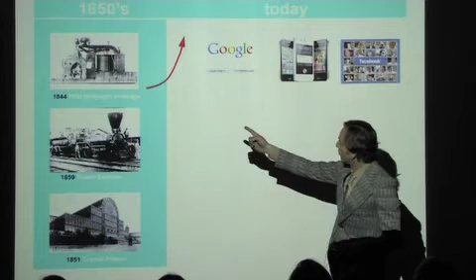Since then, a lot has happened too. You could say growth in communication has been absolutely logarithmic. Today we have all of human knowledge at our fingertips with Google, and supercomputers that are really phones - or are they supercomputers? They're pocket size. Then Facebook and other technologies that make communication a completely new thing. Similarly in transportation, we have supersonic jet planes that can cause havoc, green cars with high performance, and even a rover cruising the surface of Mars. Quite extraordinary things have happened in different directions within transportation.

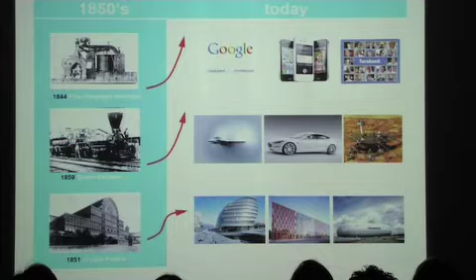But not so good on the construction front - we're building exactly the same way Joseph Paxton developed 150 years ago. So why is that? After all, in your opinion, which is the bigger industry, the bigger percentage of the world's GDP? Ours, essentially. Which has the most environmental impact? Which is the biggest polluter by far, almost doubling the impact of the next runner-up? Which employs more people, and importantly, represents a basic human need - one of the three basic human needs: construction. So how can we account for this?

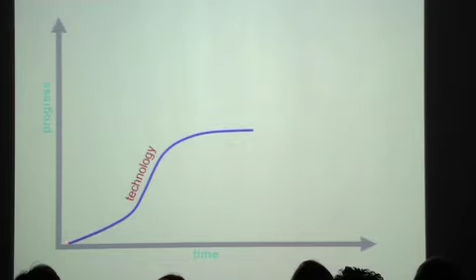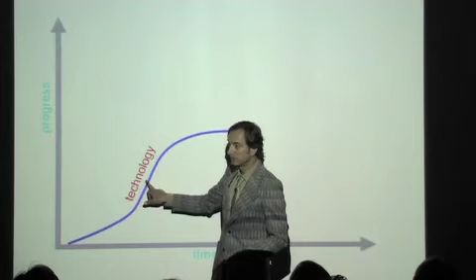Let's look a little at how ideas and progress work. Imagine Joseph Paxton was down here at the beginning of this new technology - here's Joseph. Then you have Gustave Eiffel doing towers and other buildings. Then different applications like train stations, bridges - the bridge of the Forth or Firth, whatever it is. That's where the growth curve begins, this logarithmic growth curve we like. But then it never really goes any steeper than that. Still, things are happening - the modernist movement comes and develops a new aesthetic around steel frames.

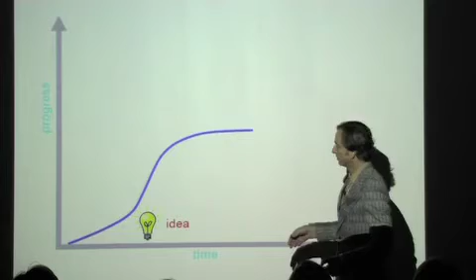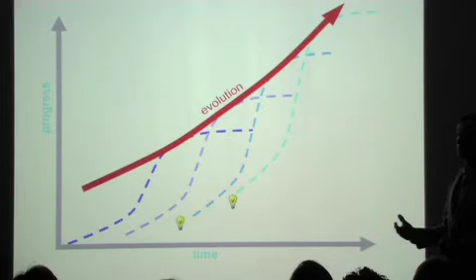Eventually, however, it tapers off, and that one technology can only go so far. That's what's happened here. In the other instances, you have other ideas coming along. We're not happy only with Joseph Paxton's idea, but new ideas come along and develop, taking over the original idea as disruptive technologies. When you have a series of these things taking each other over, you get what we call in America a hockey stick kind of growth curve, that logarithmic growth curve, which is evolution, which we like. And that's what you have in these other two industries.

So we need to do this sort of thing. We need to think this way. We need to think a little bit like my father. He has ideas, you know, about how you build. One particular day, he was playing tennis with a buddy of his.

Did you win or lose? I think that I lost. Well, you may have lost the game, but there were other advantages.

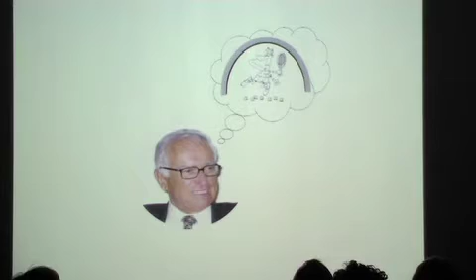He was playing under one of those balloons, and it was snowing. He didn't really perceive that it was snowing because there wasn't a big pressure differential with or without snow. But a lot of snow had fallen, so much that essentially the two of them were trapped inside. So he started thinking: my God, I'm playing tennis here, and all of that snow load is up on top of this roof, obviously with very little pressure.

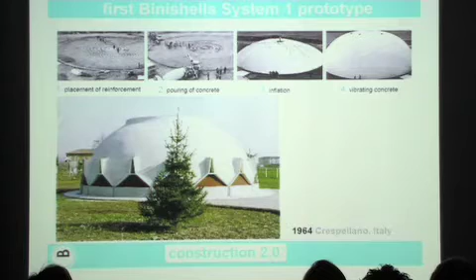Out of that came this new way of building, suggesting the seemingly crazy notion of pouring concrete on the ground and inflating it as if it was a soap bubble, but actually he pulls it off. I'm going to show you more or less how this works in diagram form. Then we're going to cut to a quick movie that shows the same thing in real life, and then we'll come back to the slideshow.

So the way it works is this. You begin with a slab-on-grade foundation. It's round, and the perimeter is thickened with what we call a ring beam. There's a pump at the end of a tube that starts in the middle of the slab-on-grade.

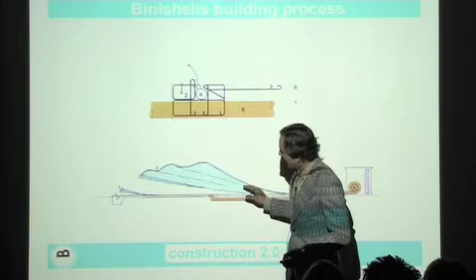Onto the slab-on-grade, he fixes a membrane, secured around the perimeter of this foundation. Then he stretches springs from one side of the foundation to the other, creating a pattern like a mesh of springs. Then he slides rebar into the spring. So if I'm standing on one side of the foundation, I slide steel in from this side, and someone else slides it in from that side, with an overlap in the middle.

Eventually he'll inflate it, and there'll still be enough overlap for the rebar to be continuous from a structural standpoint. Again, interrupt me if there are questions or whatever.

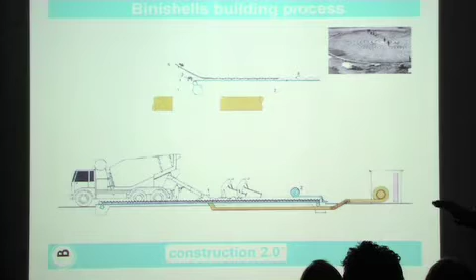Now, at the 2D level, he pours concrete on top of the springs and puts a second membrane on top of the concrete. Then he applies air pressure. Interestingly, around 0.5 psi, very, very little air pressure, about the same amount of air pressure as you use when you smoke a cigarette, if you smoke, which I hope none of you do, but I assume all of you do, because we are in England.

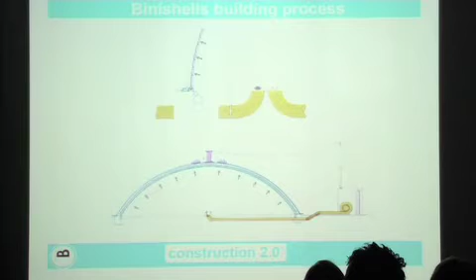So very low air pressure, and this entire mass of concrete, we're talking about 350 tons of reinforced concrete, all of that comes up with this very low air pressure. Of course, that's because each square inch of that has less weight than half a pound, and that would be helpful if we knew what half a pound weighs, but I'm sure you all do.

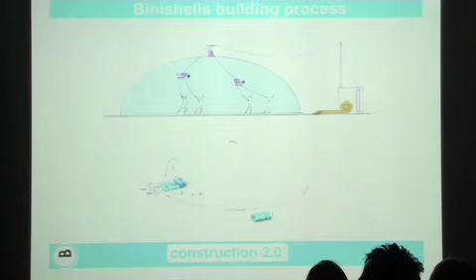Now, there's a coil on top of the middle here, with electrical cables attached to vibrators. You get guys to circle around the dome with these vibrators, which vibrates the air bubbles out. Then you get a concrete shell, the concrete shell dries, and you can cut the openings out. So again, I said I'd go to a movie.

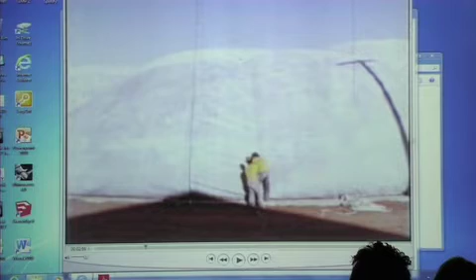How long does it have to be inflated for? Depending on the size of the building. If the size is, say, 12 meters in diameter, like the first one that I built with this guy who was shocked about seeing this coming back from this event, it takes only one day.

I was really silly leaving the blower on for the entire night by itself, because if the electrical power had gone off, we'd have been in trouble. But I was lucky, the blower worked the entire time, and so the first Binishell was up, and it's still there now.

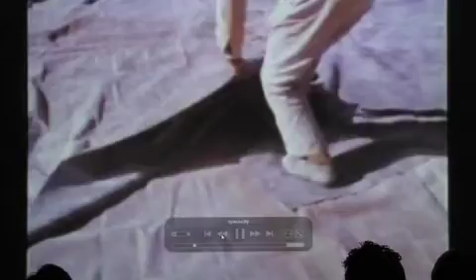So cut to this movie, with its fabulous 1970s soundtrack. I'm actually going to speak over this because I don't know how to turn it down. Let's try this. There we are. I got it, thank you.

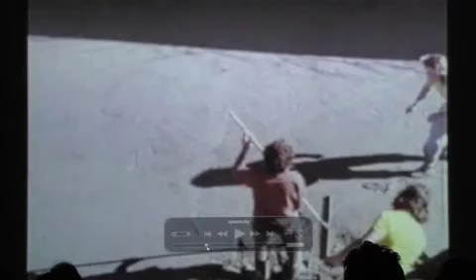Essentially, this is the first membrane, and they were doing a test inflation right at the beginning. Here is the steel that's come in and been stretched, with the rebar slipped inside. Now they're pouring the concrete flat on top of the steel, troweling it flat, and then a second membrane is folded over the entire wet concrete surface, and then you have magic.

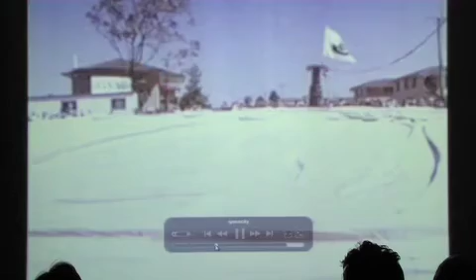Now I can turn it up again because I know you all love 70s. It is the only power which lifts the concrete into the desired shape and eliminates the tedious and expensive conventional methods which are also so time-consuming.

There's a time-lapse view showing this thing coming up in just a second. The shell takes about an hour to rise to position. The inflation is best illustrated by the use of our time-lapse camera. So this is a 40-meter diameter dome coming up in an hour, shaped by air pressure, in 1978 or something.

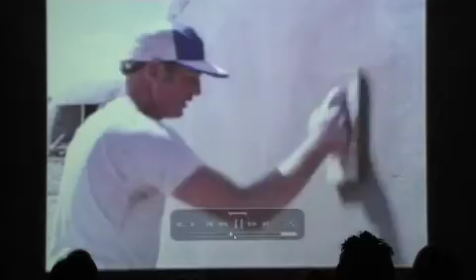Once the shell is up, the vibrators are started, so they vibrate it, and finish the exterior surface above the render line, both from a waterproofing and thermal insulation standpoint. And then they cut openings and do the interior finishes.

You can see this movie on my website entirely, which is interesting. Now, we don't want to waste too much of your time, but if you want to see the details, you can see it. So a number of other Binishells were built after the prototype.

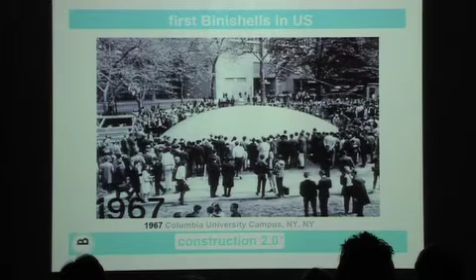It's interesting, if you guys are interested, I encourage you to ask my father, otherwise you can read about it in the book. But one of the next ones was actually, we went from this small town outside of Bologna to the University of Columbia campus in New York, with an amazing mathematician called Mario Salvadori.

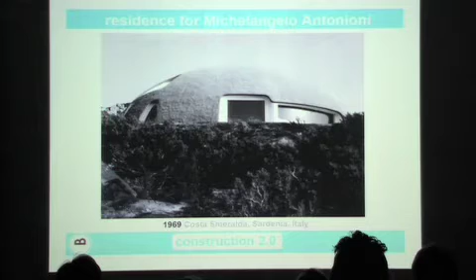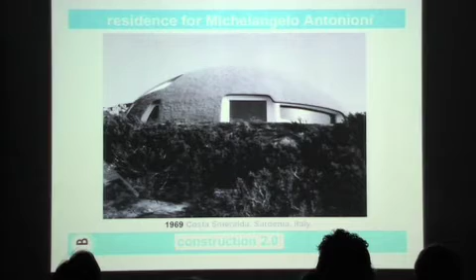It's a fun story. But another fun one is that Dad designed this house for, if you're a film buff, you'll recognize the name Monica Vitti or Michelangelo Antonioni, who did the film Blow Up. She did a lot of other stuff too, and apparently was a very good cook. This is on the Costa Smeralda in Sardinia, and it's a beautiful dome that I encourage you also to ask Dad about, the process of designing and contextualizing it.

Of course, a dome is the most efficient structural system you can design. So you can leverage that efficiency to use less material in a more effective and environmental way. Secondly, monolithic domes are thermal bridge free, and that has a huge impact on their environmental advantages. We'll get back to that later.

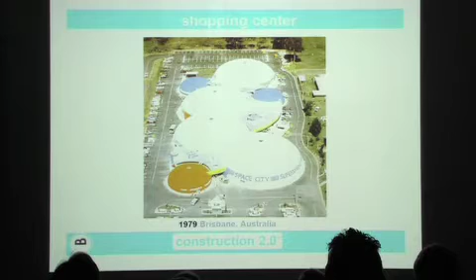This is a 64,000 square foot complex, about 6,300 square meters, a series of shells. This is actually the one you saw in the movie. Each one of these is 40 meters in diameter, and the entire complex was built in around 8 months. Not quite Joseph Paxton, but we're trying. This is a system called the Binishell system that I've rebranded Binishell System 4, with some modifications.

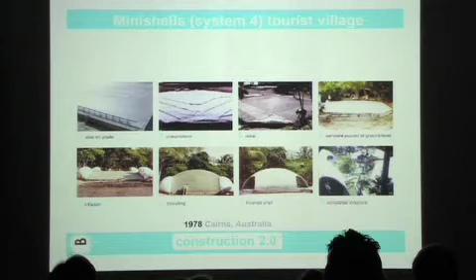It resulted—and here's where I begin to illustrate how one system led to the next—from a lecture just like this. Dad was speaking, and one of the students put his hand up and said, this is all fine and good, but I don't like circular buildings, and my bed's square and my table's rectangular and all this other stuff.

It just doesn't fit my lifestyle. Can't you do a square one? And while you're at it, I think you're being very silly, wasting all that stuff that you're cutting away to make your openings.

Why don't you just have the openings magically appear and do away with the ring beam that you have to reinforce the opening with? Literally, this is some guy's question, apparently. I wasn't there.

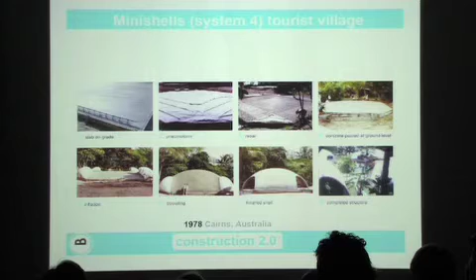Dad actually came back a year later with this solution: a square-based dome with the corners cut away, which has what he called spinnakers in the corners. And as it rises, these spinnakers balloon out.

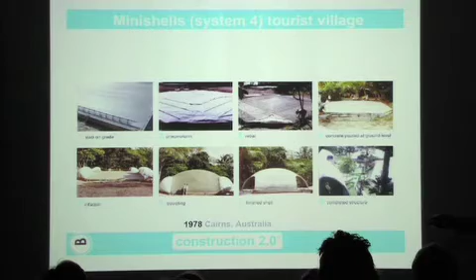There's a number of advantages here. First of all, clearly not pouring in the middle, in the corners here, it gets you the openings in the end. That's one advantage. No waste.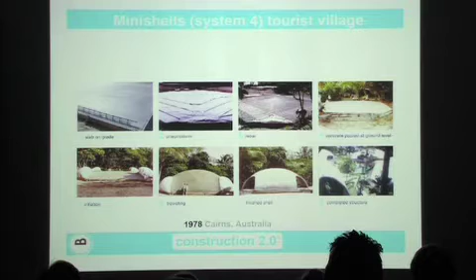Secondly, the four spinnakers stabilize the inflation process. So that helps. But really interestingly, I think this illustrates what happens when you work with nature versus working away from nature or against nature, which is what the construction industry typically does. When you work with nature, it works for you.

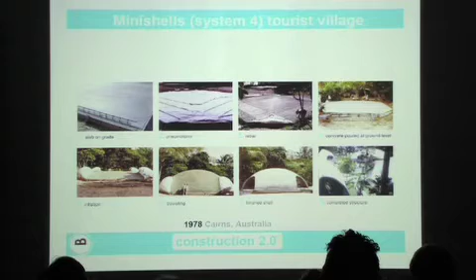What happens is there's a differential curvature, or radius of curvature, that exists between the central portion of the dome and the spinnakers. That results in a beautiful stiffening perimeter for the opening that also acts as a natural gutter. So it works in so many different ways because nature's like that.

Brilliant efficiency from a design and structural standpoint. From there, he challenged himself to build bigger.

The constraints there were the weight of the membrane. These are actually pretty substantial membranes. I forgot to mention that you can reuse them. They're made of a substantial material, the same material you see in those stadia with fabric tensile roofs. So it gets really heavy as you get bigger, especially.

So instead of having one big piece, he had a series of rolls that, like a Union Jack, fold over each other and create an airproof membrane. The cool thing is rolls are a lot easier to fabricate, a lot cheaper, and you can roll them back up and reuse them. A lot of cool things come out of that.

That was one constraint he wanted to address. The other was that as the dome got bigger, you were limited by the concrete, because on one side of the dome it would start setting while you're still pouring the other side.

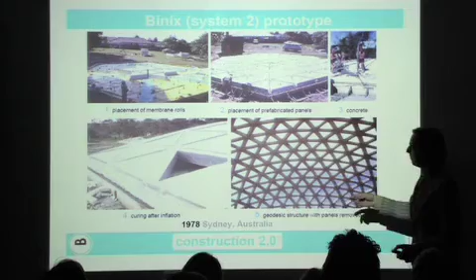So he minimized the use of concrete by introducing triangular panels. Essentially what you get is a geodesic dome where the compressive elements are in concrete, and you have infill panels that you can keep in or keep out, or insulate acoustically. It allows all sorts of different variation.

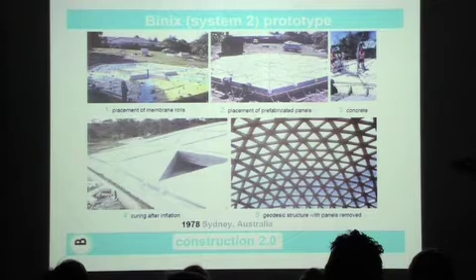So this is the Binix system. I call it Binishell system 2.

Then you have this one, where he said, well, why do we need concrete at all? The way this system works is you have nodes that connect a series of members that are able to rotate up and down and also torsionally.

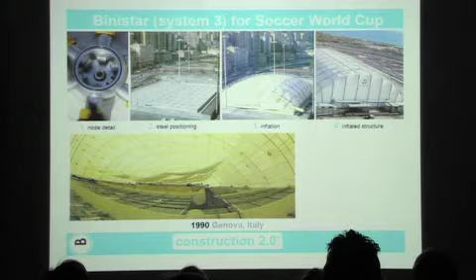The members can expand telescopically and click into place in the same way an umbrella does. So as you inflate the membrane, which eventually is hung onto the steel, at first it guides the steel up until these pieces of steel lock into place, and you get this structure.

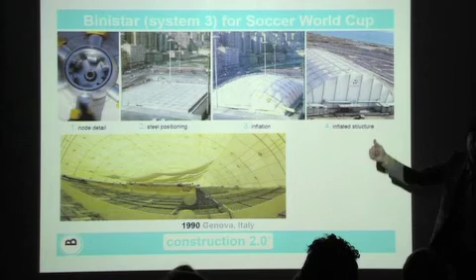Now the advantage of this structure is that, A, you don't need concrete, so you can build it really big. But B, since you don't use concrete, you can demount it. It's a kit that you can take away.

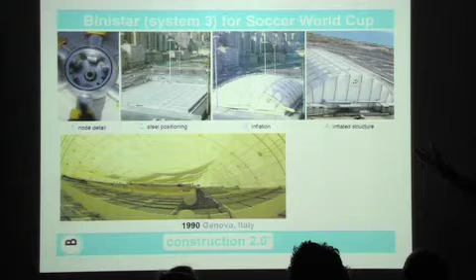And in fact, that's why they used it as press facilities for the Italian World Cup in 1990. [Question about the] membrane that you would be using to inflate it.

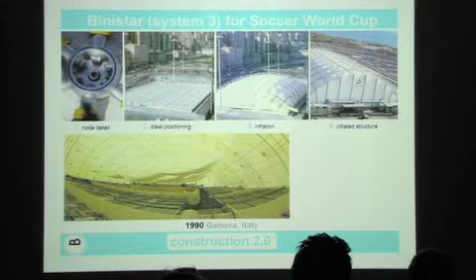Same material, yeah. This material can change, can have different ability to be flexible or not if the change in temperature is dramatic.

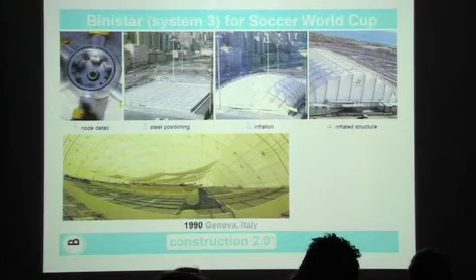So initially, because of this reason, I used neoprene reinforced by nylon. And if you have a very low temperature, for example in Canada, we have been using this because of the temperature — this is PVC reinforced with polyester.

It is a standard thing, and it is affected by temperature. So depending on where you are building the structure, you change the membrane.

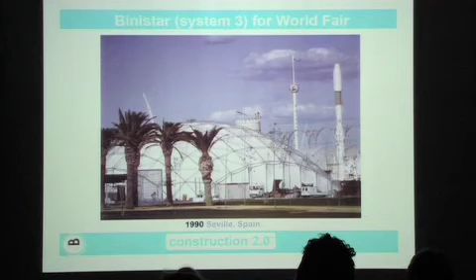So this system was used for a number of different applications. Here's a World Fair application in Seville, military purposes, as hangars. And from that system, you can see how a guy like him would arrive at this.

Here is a mile-high city, or the infrastructure for a mile-high city. And the city itself is a series of skyscrapers that is hung within this sort of space frame pyramid.

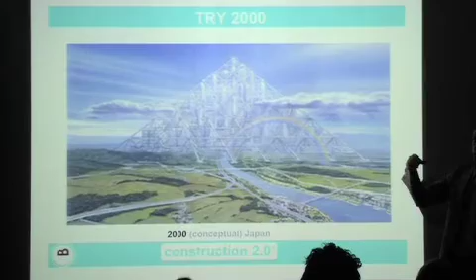The same sort of thinking was used to propose a way to build this thing. This is a design that a company in Japan, one of the big construction companies called Shimizu, came up with, and they turned to Dad to figure out how to build it. And he did, in theory. If you're interested, there's a Discovery Channel show called Extreme Engineering, and it's really fun. So that's a series of technologies, and there are others.

But now let's look a little bit at where we are today. Plato said that necessity is the mother of invention.

Today, buildings are by far the biggest polluter, horribly so. They use 50% of our natural resources, which is really scary. 40% of our energy, which compares to around 23% for transportation. 40% of our carbon emissions come from buildings, and 35% of our solid waste stream.

So clearly, lots to be proud about as aspiring architects. Did all of you know this? I told them last year, but they've forgotten. No, I didn't know it either, and I discovered it.

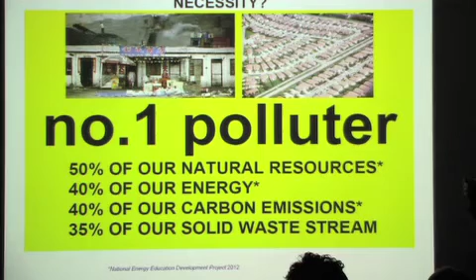This is what actually changed my architectural path. It's little known, but we have to recognize it. Do your research. These are the numbers, from the National Energy Education Development Project this year.

From a safety perspective, we see this all the time. What we're doing to the Earth is creating an ever more frequent series of natural disasters. The number of natural disasters actually doubles roughly every 10 years. So that's bad enough, but the second part is that they're getting stronger.

That's really bad, considering that the way we build with 90-degree angles is the least structurally effective way to transfer loads. It's preposterously stupid. And yet we are very happy putting our lives at risk and our children's lives at risk in unsafe buildings.

The really extraordinary thing is that places like Hurricane Alley in Florida, where storms come every year, they're perfectly happy to have the things disappear in a cloud of rubbish and then rebuild the same thing, the same way. It's absolutely crazy, absolutely nuts. So the system is broken, and all you guys have to fix it.

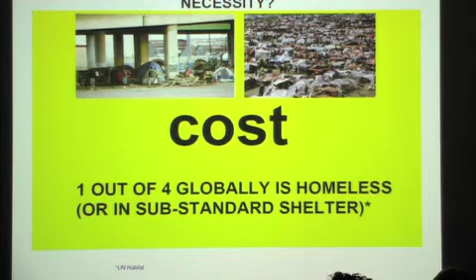Another horrible thing, we have to do something about the cost of construction. It's too expensive to meet the demand and the need that's out there.

So let's look a little bit at the future now. What I started doing with a friend of mine who was an engineer, a lot smarter than me, I said, look, I just had 2 girls, and I don't want to be part of the problem anymore. I need to at least try to be part of the solution. We started looking at this thing as a hobby, and we circled around and realized that my father's systems, with some modifications, could really begin to address these problems.

A lot of the modifications had already been done by smarter people who took materials and made them greener, made them more flexible, and did that work for us. Another part of it was the codes. The codes had changed, so we needed to bring Dad's systems up to code, and in so doing, modify them. And why not simplify them and make them easier to build by unskilled labor that could be locally sourced?

The other cool thing is that the only sector within construction which is growing logarithmically and is on course to take over regular construction is green construction. So there's a tremendous opportunity here to fill that need and fill that opportunity.

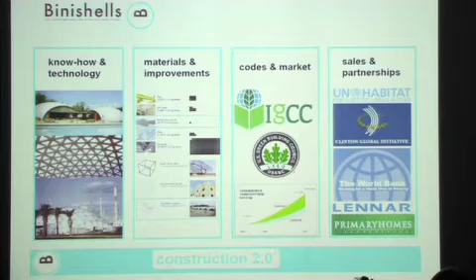Out of that came a series of new systems, which we developed with Dad and some other people, all of which are smarter than me. The first one was based on Dad's Binishell system, so I've rebranded it Binishell System 4 because it's built differently now.

But it still results in this incredibly economical yet very environmental sort of shelter, which is about a 900 square foot square-based dome with the openings built in.

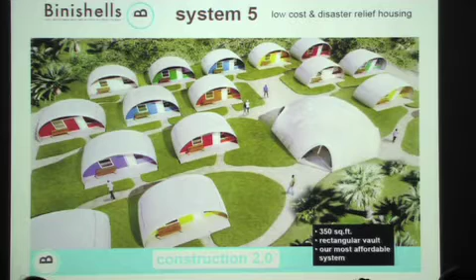Then we looked at the parameters for low-cost housing as stipulated by some of the big organizations I mentioned earlier. Out of that we developed a double curvature vault, which is super cheap to build, super fast, super strong, and super green—a whole new system to meet the needs of the developing world and all the places we need to build better because they're being devastated by natural disasters.

And then we also developed a new system which we call Binishell System 6, which results in these very architecturally—I like to say—sexy designs. They're curvilinear, beautiful natural forms.

And they're not natural in the sense of organic, where you force a material to be curved so it looks like nature. Literally, these are designed by nature, because it's Pascal's laws that create these shapes. This gets back to the earlier point: when you use nature, it helps you. These are literally form-finding diagrams, as structurally effective as they can possibly be given this perimeter. So again, using nature helps.

So what are the advantages? Well, there's a huge advantage with regards to reduced costs, both from a bottom line dollars and cents, pounds and shillings perspective, and from an environmental perspective.

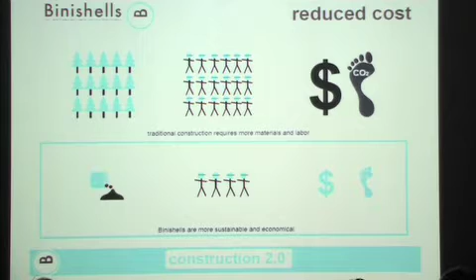As you all know, the two biggest line items in construction are materials and labor. So when you use less of them, it becomes more affordable, both environmentally and from a cost perspective. And if you use greener materials, that helps as well. So we're talking big advantages—50% here, 75% there. Right there, you have a game changer.

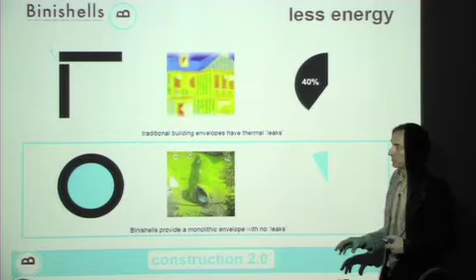Secondly, you use less energy over the lifespan of the building. Why? Because traditional buildings are built like we built cars in the 50s—they did everything but drive well. They have all these wings and crazy design things that have nothing to do with what they actually do.

I used to drive an MGB GT '67, and I loved driving right next to one of these gigantic hulks thinking, dude, what happened here? Because these are from the same year. Anyway, yes—Americans are very good at being wasteful.

So let's just blame it on them for a second. They build stick frame buildings, and those are really bad because they're like bottles with holes in them from a heat perspective—literally everywhere there's holes for heat energy, which is the energy buildings use most of, to escape.

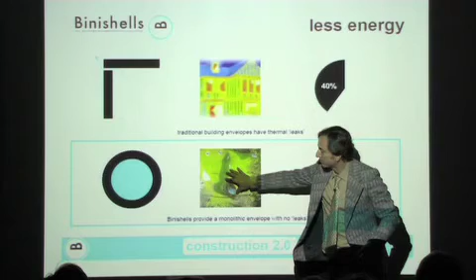By their very nature, shells are monolithic, so they don't have thermal bridges. Once you eliminate thermal bridges, right there you diminish energy use, according to the International Energy Agency, by about 40%. Extraordinary. Once you get rid of the thermal bridges, you just insulate it properly for that temperature zone, and you're doing a ton better than the Americans.

Waste: 35% of the solid waste stream stems from construction. Why? Because building materials typically come in linear or sheet form and therefore are cut on site. They're also bundled—you get 10 for the price of 8. So you buy a couple more bundles, and even if it ends up in the trash, you win anyway from an economics perspective, which is all that counts, right?

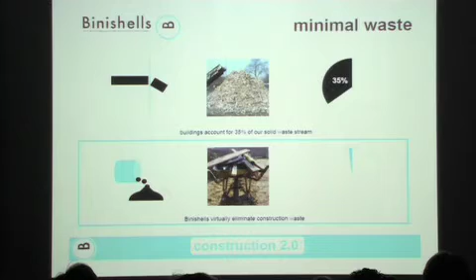But when you use poured material, you actually only pour as much as you need. In the case of Binishells, you're using air as your formwork. So again, very, very little waste.

And then another big thing is speed, construction speed. Why does that matter? Because if you're building disaster relief, the faster you provide these shelters for people, the more lives you're saving, which is a nice benefit. But the other thing is that the faster you build from a builder's perspective, the more projects you do and the more money you make. And that's important if you care about the environment, because if you make the people who end up building win, they're more likely to choose your solution, which fits your criteria.

It's important to think about the market as well. When you build a structure shaped by air pressure, you build an inherently strong structure, so when a fire comes, it doesn't burn down because there's nothing to burn. In high winds, a typhoon or hurricane situation, it couldn't be more aerodynamic, so you're looking good there too. In terms of an earthquake, you have a low center of gravity, wide stance, distributing load, versus the typical situation. So you're doing as well as you can in earthquakes as well, and it goes from there with flooding and other situations.

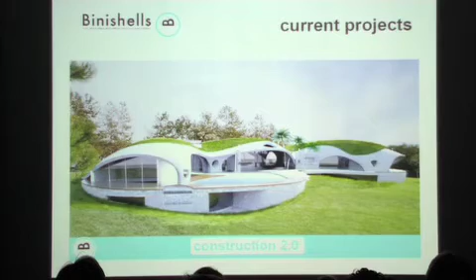We're very fortunate to have this as a launch project. This is a house for an actor you all know and hopefully love, in Malibu, overlooking the Pacific Ocean. It's just a great opportunity to bring the idea out to the market. Here's an interior view of the same building.

In terms of people who've looked at it and had positive things to say: Bill Clinton and his foreign policy advisor said Binishells were the first system he'd ever seen that checked all the boxes for low-cost housing and disaster relief. The World Bank wrote us a really wonderful letter of endorsement, which is very difficult to come by, apparently. Forbes magazine named us one of the 31 names to know this year, and the U.S. Army Corps of Engineers conducted three studies attesting to the environmental, structural, and cost benefits of our systems.

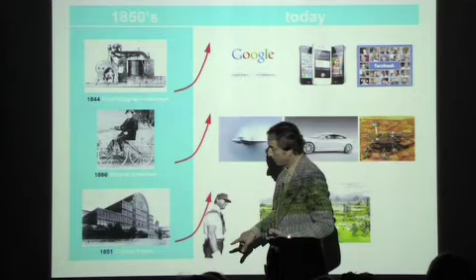So what we're trying to do, and what we invite you guys also to try and do, is to be more like these other industries. Follow Dad's example, the new way of thinking, and bring construction into the 21st century. Thank you very much.

At this point, I'd like to add a little thing. As I said to you, I don't like lectures in general, they are boring, and I like you to come to life and ask questions, because the future is on you. There is only one attitude that you have to establish in your brain: try to think out of the box. I wrote a book about this, and I hope you will have the opportunity to read it.

At the present it is in Italian, but will be translated soon into English. And I have to say that the input from the students I was teaching was tremendous in helping me develop my technologies.

The best example is the Binishell. You know, the guy at the end of the lesson room said, 'Oh, I like your idea, but you made a lot of mistakes in doing this.' Yes, I like this attitude. I've made a lot of mistakes, and I think I'm going to make a lot of mistakes in the future, but it's the attitude of trying to do something different, because we cannot afford not to do it in the future. Nick was describing very clearly something that is dangerous for all of us and for our kids.

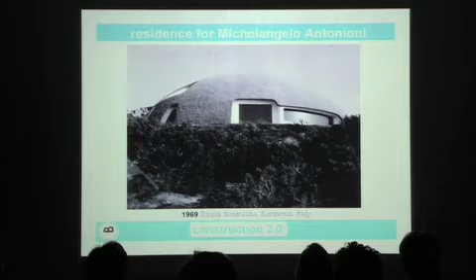Thank you, Will, for asking this question, because I learned a lot during the construction of this house in Sardinia, in Costa Smeralda. The guy that asked me to design his space of living said, 'I don't want a house, I want to live in the space, a three-dimensional space.'

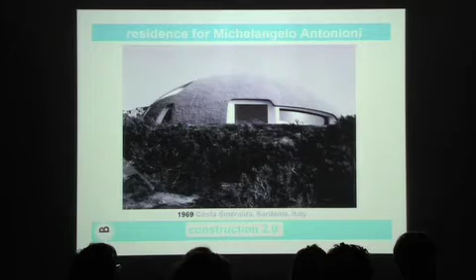I hate flat floor. I like to live in a sculpture, naturally, inside a stone. Okay, so the first impact was a little bit embarrassing, because I didn't know what to answer to this question. And then he says, Listen, I ask you to do something, to think about architectural design as I am thinking about it.

I say, what do you think about architecture? He says, architecture is not only light, shade, but it is smell. Architecture is smell. Yes, it's smell. I want my house to smell, to have a flavor of the nature that is around it.

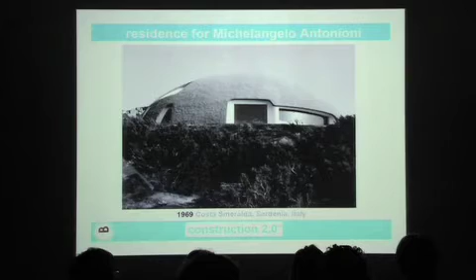He said, Did you ever try to smell a piece of stone? I said, What? He said, Come with me, let's go in a quarry. And he forced a guy that was there to cut a big stone of granite. As soon as this stone was cut, this guy, Michelangelo Antonioni, put my nose there, said, Try to smell it. And I tell you, the smell of the broken granite is incredible. It's fantastic. You see, I want you to give me a house with the smell of the stone.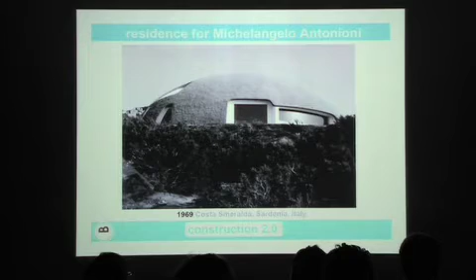So I was requested to build a staircase with stone just cut. Not only that, he said, You see, do you like juniper? This juniper? Yes, I want to smell juniper in my bedroom. So we cut slices of juniper, and we put the juniper on the ground. We smooth it, and in real terms, when you walk inside this room, you feel this incredible smell.

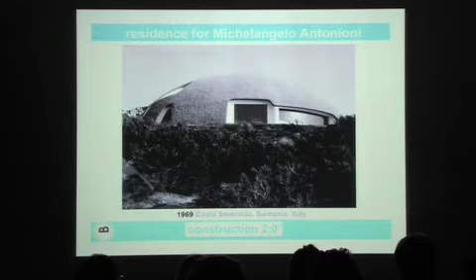And he said, smell the nature around you. And indeed, the dry herbs, rosemary, and so on, was so intense that he said, My house must have the smell of the garden that is around you. So I built a garden in the middle of the house. Then he says, The house must have also a sound.

I never heard about this in my school of architecture in Florence. Yes, come here, listen to the sound of the waves. You see, my house needs to have the sound of the waves inside. And says, anything else? Yes, of course, the wind. I want to hear the wind that is coming from the sea.

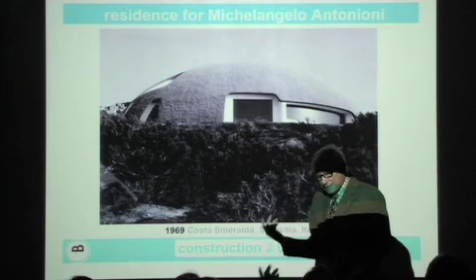And this is the reason I made a big opening here. So in real terms, when you go in this house, in addition to the smell, you hear the sound of the environment around you. So I'm just telling you this, that when you have a client like this, try to follow, because you really learn a lot. I did learn a lot working for him.

And I don't want to describe the other things he was teaching me about the architecture of his house. So this is the house that, thank you for asking the question, that I prefer, because it came out with a lot of natural things that are part of it. Indeed, the surface here is made by rocks of pink, little pebbles of pink rocks. So this actually looks, this was in the beginning, but now we have all the trees going around, and it is part of the nature.

Sometimes you don't see this structure, but when you walk inside, you are in an incredible environment, which is part of the environment that is outside. But also he said, I want you to build in space, not having a flat floor. So in this house, you live in different levels, and this gives you a totally different feeling. So this is the house that I like more between all my projects.

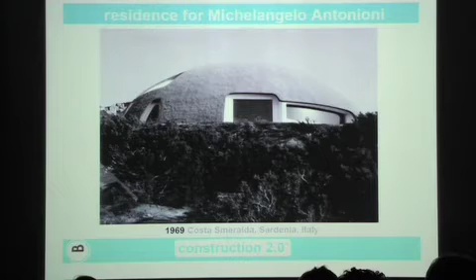Point out to us which parts of that house are shell technology or concrete. It's all shell technology, except for the openings. I cut the opening after the shell was done. I didn't understand the question.

This is a dome, a monolithic, elliptical shape dome, in which I cut the roof, so you can have rain and wind and sound inside. I cut the windows to see the sea when you walk inside. In this house, you walk in from the top, not from the bottom. So when you walk inside, you see the sea, because the entrance up there shows the sea, and you see the movement of the sea from there, the light, the colors of the sea. So it is a house that is very much connected with nature, but it is one monolithic shell.

I think I've spotted another mistake. Yeah, which one? No, it's probably not right. But one of the things you said, which I think is one of the important things about technology, is the speed at which you can make them.

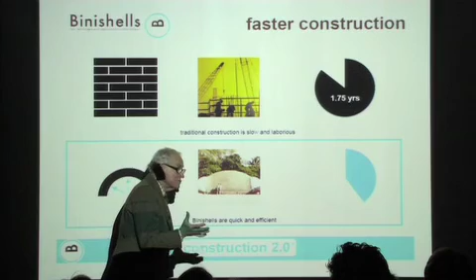When you build a shell like this, and you build a ring beam with the same system, the opening, you don't spend any time and you don't lose anything in relation to the process. The process is building. Like Nick was saying, if you work with nature, it helps you do things in the best possible way.

So that is astonishing because all the Isler shells, many of them, and the Felix Candela shells, they built in a lip to reinforce the arches. They actually designed that. And you found one that designed itself. Another round of applause.

Even Felix Candela was a good friend of mine. I met him in Mexico, and in many parts of the world. And Mario Salvadori, who was the man who invited me to Columbia University, he was a great mathematician, and part of the Manhattan Project for the atomic bomb with Fermi.

He could not believe that a mathematician, an engineer, a professor, a civil engineer could do this. He said it is impossible that you do this. And indeed, the professor came to see it. He came to Italy to see it. And then he invited me to Columbia University. There is a photograph of me actually designing and building on the campus, for the first time in history, at the School of Engineering of Columbia University.

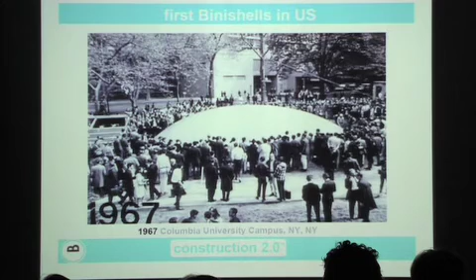That's the point. Can I add something about that? We were seeing stats you showed about 50% energy, 40% CO2 emissions from the actual status quo of our cities, of our world. How do we reduce that with your system, because we will never be able to change that given the actual existing architecture in Western cities - what we have as existing buildings. They're there to stay.

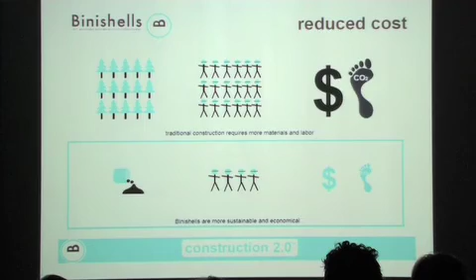And if you go to a planner today with that geodesic shape or double curvature and try to argue that with this intervention you'll emit less CO2 in this city - specifically London, or Italy, or New York - it's going to be a very big fight, and very likely not to be granted planning permission, because of whatever we want to do.

This building here is selective - I understand your point. It's a market which is... well, I wouldn't say reclusive, perhaps it's a very niche market away from the city, where there's already a precedent of reality, of the city, which has its own architectural language and character that we have to cope with. And therefore, going out, perhaps it's necessary. The situation today is... sorry, you cut me off, so it's only fair. Okay, so the situation today, you know, Italian style.

The need for housing around the world is in the order of 50 million units in the next year and a half, okay? And that's simply in 3 countries. So it's not like we're going to remain at the status quo at 50% if we just keep going the way we're going - we're going to get up to 60 and 75% of a bigger polluting pool. So it's important to think about how we can build bigger, better, from an environmental standpoint, just to stay at the status quo.

That's the first point. Secondly, yes, but hang on just a sec - this building here is being built in Malibu. Some of you may know that Malibu is considered the most difficult place to get permits in the world because it has very stringent environmental issues, as well as the California codes, the Coastal Commission codes, and the seismic issues you get in California in general. And it's flown through the permitting process faster than anything ever before.

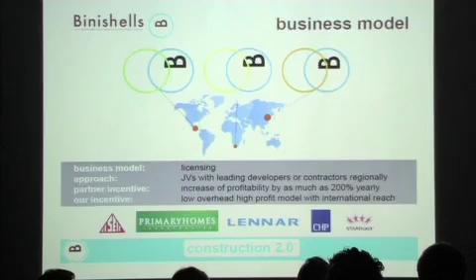Fascinating question, and there's no real answer to that. But our approach is this: we see ourselves today as a technology company working within construction—strangely, that's a novel idea. So we've developed some prepackaged systems that address what we see as the biggest areas of need within the construction market: housing and education, low-cost housing, disaster relief housing, as well as infrastructure projects.

Now, as part of doing infrastructure projects, we're also doing high-end custom homes for famous people, because guess what—that's generally how the market works. It's 'I want to be like him, and if it's good for him, it will work for me,' and that's part of marketing. So we're doing these projects as well, but this is what we see.

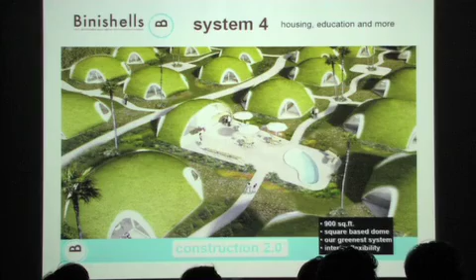One second, before you continue, can you go back to that picture? I think this is the best scheme, in my opinion, so far in this presentation. How much can you cut off from that skin, the roof scale? How much can you get rid of it? I just want to understand how much we can modulate and manipulate with that surface.

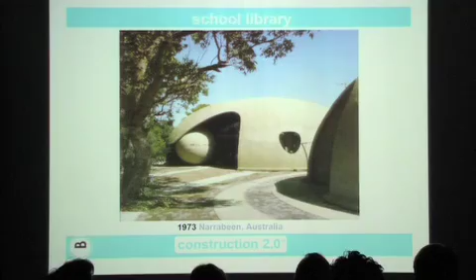It depends on the intensity of steel that you have in the thin shell structure. You may have seen in some of my domes that I cut a large portion of the dome, even without putting a reinforced ring beam around it, because the steel intensity is so dense it's like a ferrocement or Nervi type of structure. In the case shown before, what I did in Australia when cutting a large portion of the dome, I was building an arch beam inside the structure, connecting the steel and the concrete to the shell itself. Of course, this is more expensive.

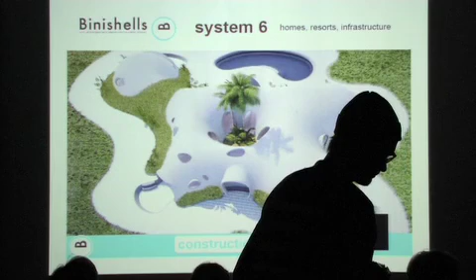So do you have some sort of scale parameter—how much can I remove from the shell? Exactly, and you have to more or less know in advance. We're talking about 2 and a half inches, 3 and a half inches, which makes up the shell.

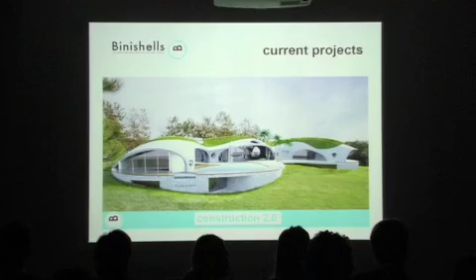Now the ball is in your court, so play it.